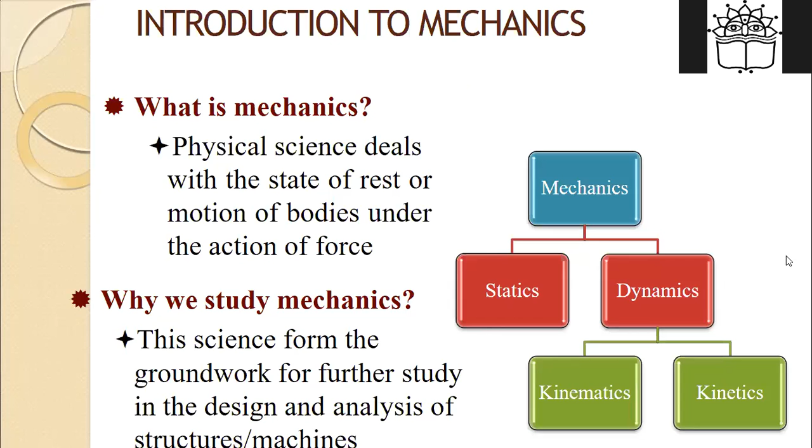Again coming to engineering mechanics, there are different types studied - this is the basic classification into statics and dynamics. But again, mechanics has 3 parts - three subjects. First is rigid body mechanics, which we deal with in the first year curriculum. Second is deformable body mechanics, also called strength of materials or mechanics of structures. Third is fluid mechanics.

Rigid body mechanics - I think you are familiar with rigid body. If not, rigid body means any body or structure that is not going to be deformed. It is very strong, having very large stiffness, so when any force acts on that body, the body is not going to deform at all. This is an assumption - actually when a body is subjected to external force, it is going to deform, but that deformation is very small, and we neglect it for simplicity.

And due to that, it is called rigid body mechanics. Whatever problems we are going to solve in first year mechanics, all deal with rigid body mechanics. So simply the name of the subject, you can call it engineering mechanics, applied mechanics, or rigid body mechanics.

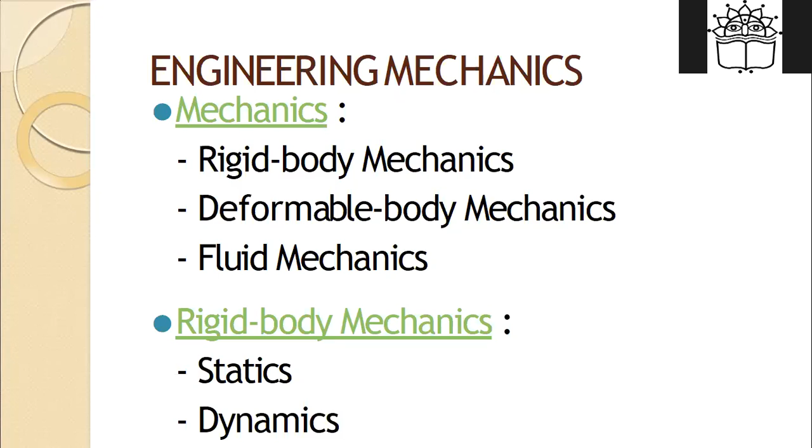Then fluid mechanics - the mechanics of fluid, water, any fluids. That will be another part you are going to deal with in your second or third year. So this is our rigid body mechanics, meaning simply engineering mechanics, statics and dynamics.

This we have already discussed. Statics means the effect on a body under steady conditions. Under statics, you are mainly dealing with resolution and composition of forces, center of gravity and moment of inertia, friction, and analysis of structures. Under analysis of structure, you are going to analyze trusses and cables.

And dynamics means study of moving bodies. Under that you are going to deal with work power energy, then impact of bodies.

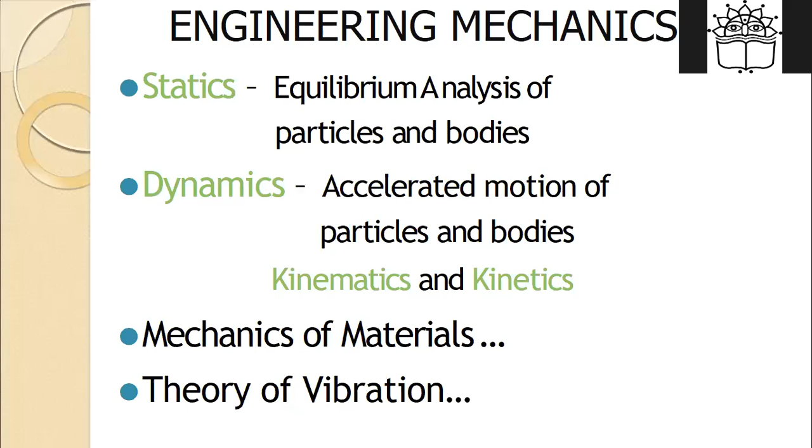Now for your engineering mechanics, there is a teaching scheme and examination scheme given by the university. See this - this is our engineering mechanics. The code of this subject is 101011. See, this is oblique - programming and problem solving oblique engineering mechanics.

Meaning 50% students are going to study PPS, and 50% students, if there are 6 divisions, divided according to group A and group B, alternatively have to study this subject. There are 3 lectures per week for theory and 2 hours per week for practicals. This is for your teaching scheme - meaning you will have 3 lectures for theory and 2 for practicals.

Then coming to the examination scheme, there are 2 examinations. First is the ISE - in-semester examination, which is of 30 marks, based on unit number 1 and unit number 2.

Now see, your college has already started. Your first round is completed. After completion of the second round, after your induction programs, your actual classes will start. And after 35 or 40 days, you have to appear for the in-semester examination, based on unit number 1 and unit number 2, with weightage of 30 marks. The university is going to conduct these examinations.

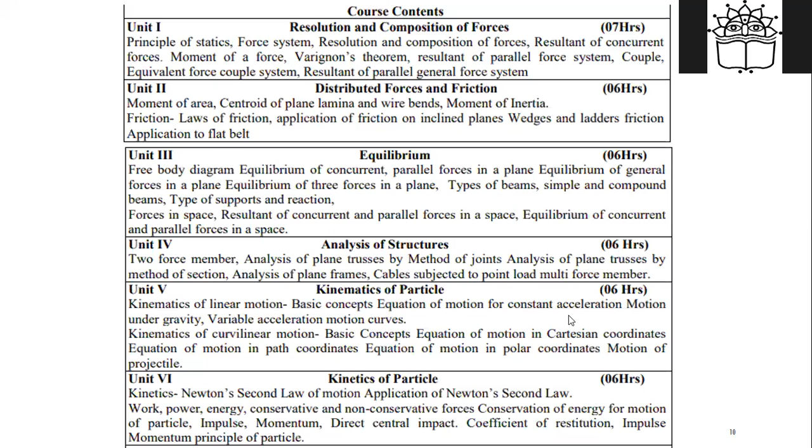And these are the number of lectures required to complete these parts. Then coming to the different books, these are the different books. All books given by the university are foreign author books. Your respective faculty will tell you which books you have to refer.

For engineering mechanics, Vector Mechanics for Engineers by Beer and Johnston is one of the good books. It is a bible. But again it is a vector approach, and vector approach is slightly difficult to understand, it is highly mathematical based. You have to adopt that vector approach.

But if as an interest or as a knowledge you have to go, you go for this second book, Engineering Mechanics by R.C. Hibbeler. R.C. Hibbeler is one of the best books of engineering mechanics, published by Pearson. It is available in our college library. Then there are other books, Timoshenko, F.L. Singer.

Coming to that, as far as our Indian author is concerned, you go for Engineering Mechanics by S.S. Bhavikatti, which is a very simple book, and in which both theory as well as the numerical part has been explained very nicely, easy to understand.

Engineering Mechanics by S.S. Bhavikatti or N.H. Dubey, published by Tata McGraw-Hill Publications.

There are a number of books available, so as per your interest, you go for that. But as far as possible, read the books, don't follow shortcuts, because each and every subject, application-wise, it will be required for your higher classes. When you appear for any interview or examination after completion of your BE, there is either a written examination or interview, and under that your basic knowledge will be checked.

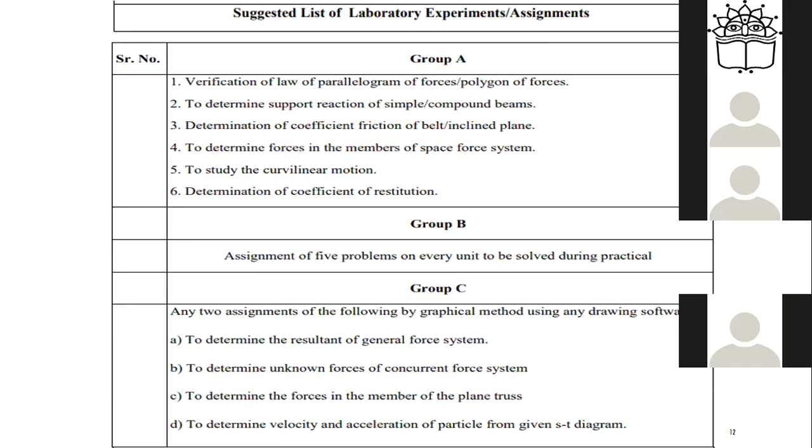Now coming to its applications. In first year engineering, it is a mix, meaning the class is not branch-wise. All branches of students will be in a single class - civil, mechanical, computer, IT, AIDS, all together.

For mechanical engineering people, when they are going to design any machines, cars, robotics, the knowledge of engineering mechanics and strength of material will be required. There are higher classes subjects like machine design, structural design. If you don't have proper knowledge of engineering mechanics, it is slightly difficult to understand.

Passing university examinations is a different thing. I have seen many students with very good pointers - 8, 9, 9.5 - but they are fundamentally very weak. Please don't do like that. Your fundamentals must be strong.

If your fundamentals are clear, you will have to put in less effort in your higher classes. For the proper understanding of higher classes' subjects, you must thoroughly focus on your first year academics - it is very important. This means your physics, mathematics, chemistry, mechanics, and programming - all these subjects will help you a lot.

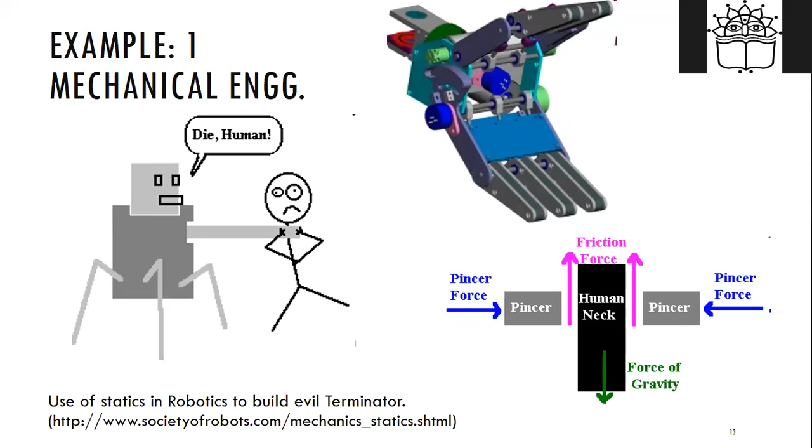For civil engineering people, they have to construct bridges, buildings, and many structures. So for the proper analysis and design of those structures, your starting point is mechanics. This is a very challenging as well as very important subject, and it is included in the first year. This subject has importance up to postgraduate courses - its application extends up to your MTech program, and it is included in the first year itself.

Application-wise, the importance of this subject is very high, but since it comes in the first year, we focus on clearing the basics, because this subject is not so easy - the entire subject is numerical based and you have to apply the concepts. If your faculty has taught 10 examples in class, there will be some different examples in the university examination.

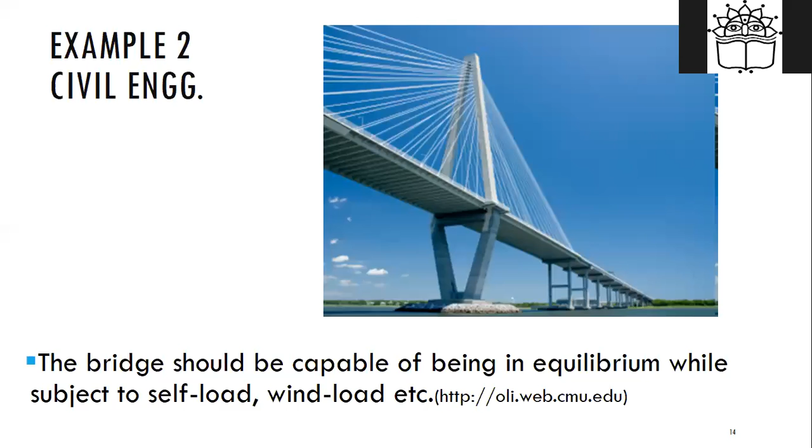Okay, a simple small change will be there, but the concept remains the same. There are just slight variations, and students are getting confused because of this and they will fail. So that's why understanding the concept is very important for engineering mechanics, for all subjects, but engineering mechanics is one subject you cannot just memorize. You must properly analyze and understand the things, then it will be very easy for you. It is a very scoring subject because it is entirely numerical, and it is interesting if you take interest in it, otherwise it looks very difficult.

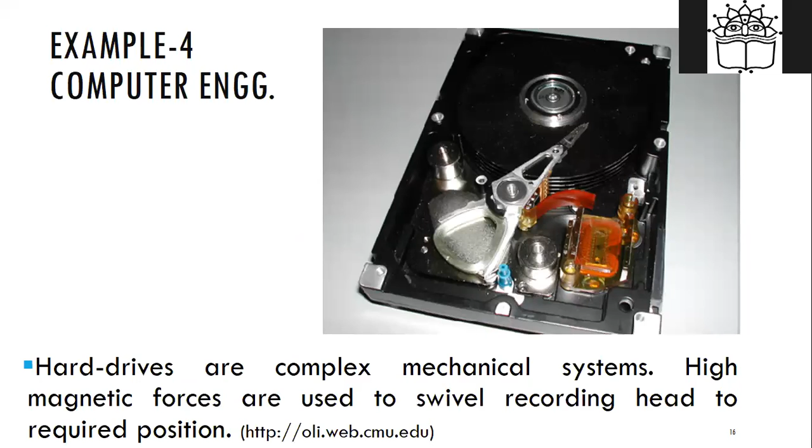Okay, then biomedical engineering - these are the applications I am talking about. For computer engineers, they deal with hard drives, and magnetic forces come into the picture. When there is a force involved, you have to deal with engineering mechanics, you have to analyze those parts. For electrical and ENTC engineers, during an earthquake, some energy has been released - how much energy has been released? To calculate that amount of energy release, we have to take the base of engineering mechanics.

Now coming to the modeling of real life problems. See, as engineers, we deal with real life problems. We have to design machines, we have to design structures. So for real life problems, we have to analyze the problem, we have to model it into a mathematical model, and that mathematical model is called the free body diagram.

It is the most important concept in engineering mechanics - free body diagrams. For every structure or element, we have to draw its correct mathematical model or free body diagram. Once your free body diagram is correct, your answer will be correct. If your free body diagram is wrong, you will not get the correct results. How to draw free body diagrams, what are the different rules - that you are going to deal with in unit number 3 in detail, when you start the equilibrium topic.

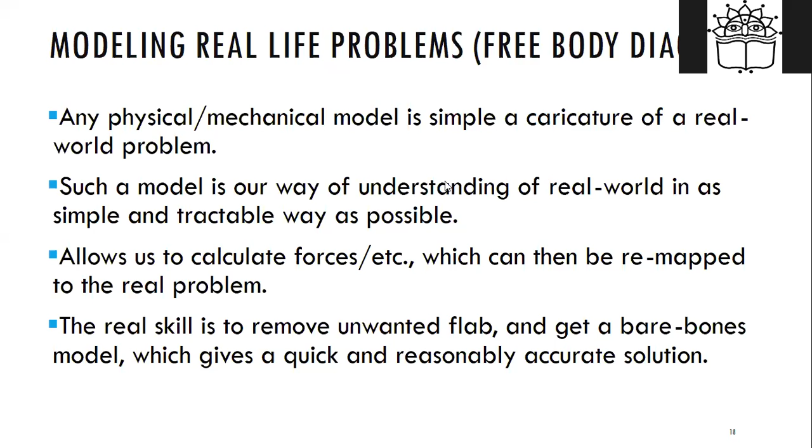So coming to what a free body diagram is, I will show with the help of a few pictures. This is one example, a real life example. One truss, a building truss, and this truss has been modeled using simple line elements. Under that line element, various forces will act, and after that we have to calculate the reactions and member forces. So this is one real life example modeled using the concept of free body diagrams.

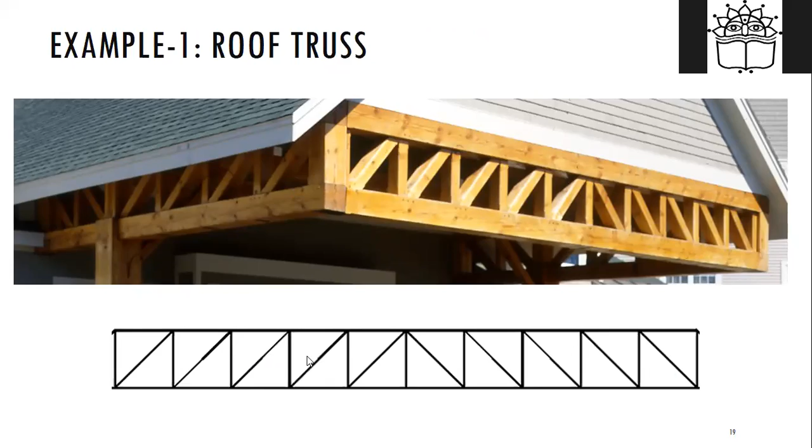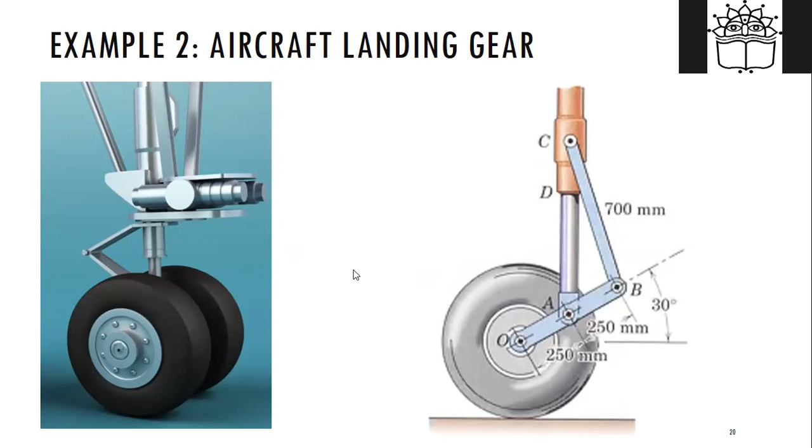This is an aeroplane landing gear. When an aeroplane lands on the ground, there is an impact force, there is a dynamic force, and the self-weight of the plane and passengers. Since all these forces come into the picture, this gear has to be designed by considering all these forces. So application-wise this is very important - we have to understand the basic theory.

This is a bridge - there are some RCC elements, railway bridge, road bridge. To analyze this bridge, this real life problem, we treat it as an engineering mechanics problem. In engineering mechanics, you deal with such beams - actually it is a continuous two-span beam, it is an indeterminate structure. But what is determinate or indeterminate is a different story.

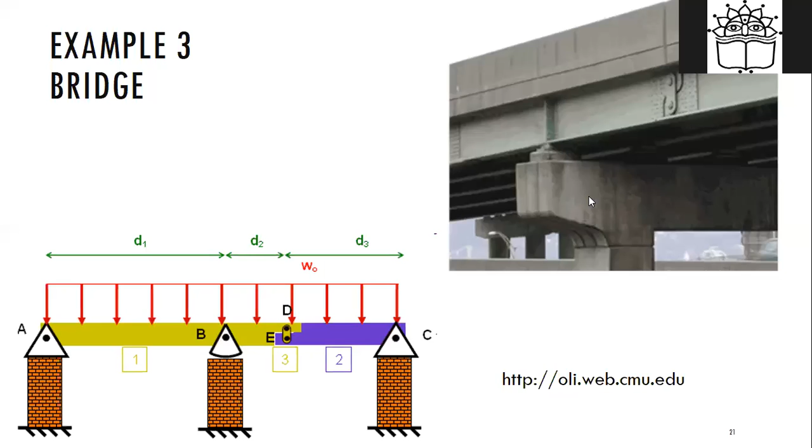It is not included here, but you are dealing with determinate structures. So these real life problems, the free body diagram has been drawn using the concept of engineering mechanics, and this is where we analyze. This is the load acting on these girders, and we calculate the support reactions, and after that stresses and strains. After getting these stresses and strains, we design this bridge - designing the girders, foundations, abutments and piers.

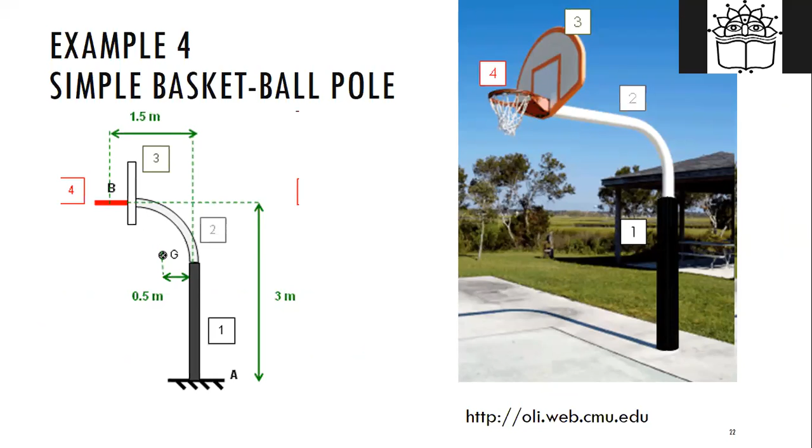This is your basketball pole, the actual problem, and this is its free body diagram. Using this free body diagram, we are going to analyze this - how to analyze, how to do it, you are going to study in detail. Now if I tell you this, you may be in a panic that it is very horrible and very difficult - don't panic, it is very simple, you just have to go the proper way. This is some such problem you are going to solve.

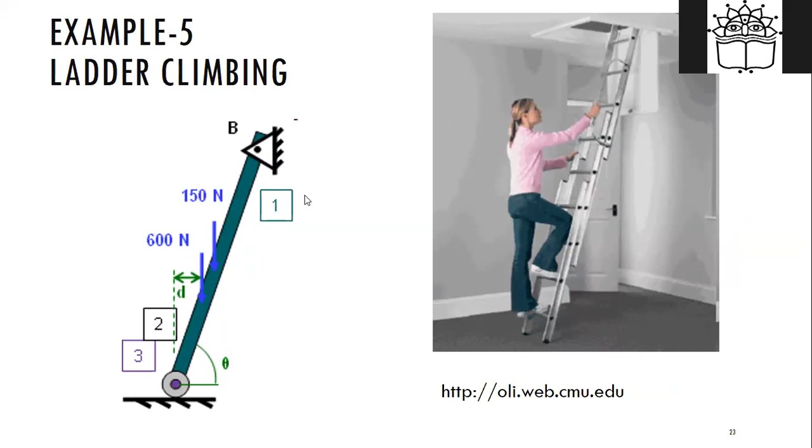Ladder climbing - this is the ladder, one lady is climbing this ladder. So we have to consider the self weight of this ladder, since a ladder has its own weight, plus the weight of this lady. So this has been modeled using this mathematical model - this is the mathematical model of this example. Now the concept of normal reactions comes into the picture - normal reactions.

Relative motions, rectilinear motions, circular motions - so this is about the basics of engineering mechanics. When college actually starts, you will deal with the entire detailed syllabus, unit wise, unit 1, 2, 3, 4, 5, 6.

Now coming to engineering as a career: globalization and subsequent invasion of MNCs (multinational companies), and the IT boom in India, has given a new dimension to these conventional careers. Nowadays you have very good opportunities in front of you, opportunities as well as challenges, so you must have courage to face those challenges and move ahead.

Now you have taken admission, so welcome to engineering. What is meant by science, engineering and technology? Science - you have done your general science - means understanding the basic natural laws and rules. In engineering, we have to apply that science to make our life safe and comfortable.

For our safety and comfort, we design buildings, we design cars, we design computers - these are applications of science. And after that, technology comes - the outcome of engineering design is technology.

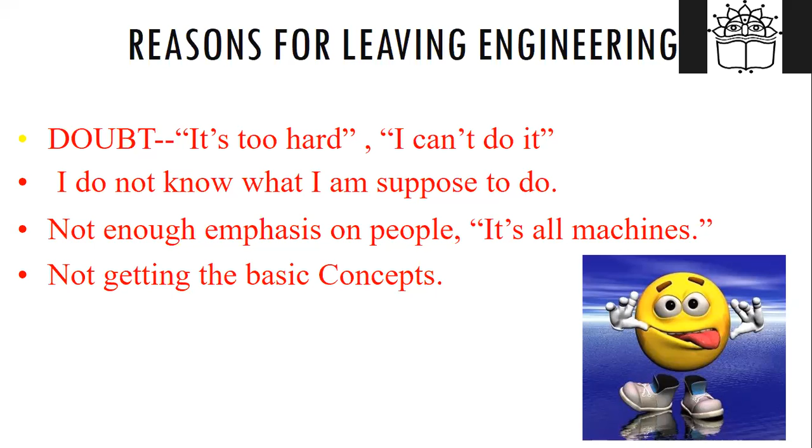But see, not getting the basic concept doesn't mean average students cannot perform well. You just have to give sufficient time. So time and consistency are very important. Those students who are very consistent will definitely succeed in their lives, and their performance will be better than the toppers of the class.

So, should you become engineers? I will skip many slides because there are a number of slides. What are the qualities as an engineer? What qualities do you have to develop? This is first year engineering, and I have already told you this is the right time that you have to use these 4 years in a very systematic and planned way. It's not like that every time you have to study.

You have to enjoy your college life, and at the same time develop your ability, your different skills. You have to develop interest in engineering - definitely you have interest, that's why you have taken admission - and at the same time develop your analytical skills, your problem solving attitude, and communication skill. This is required, because there are many students who have a very good pointer, but they don't have the confidence of good communication skill.

They are not able to properly talk in front of people. So ultimately they have to either work on that, or if they don't, they will get a penalty, or they won't be able to succeed due to that lacuna. So proficiency in each and every subject, persistence, listening skill, team attitude - your consistency will be very important. You have to develop listening skill. It's not that if you are the leader, every time you have to order people - you have to listen carefully to your colleagues also. Listening skill is very important, because many times your problems will be solved by listening to other people. And team attitude - we have to build teams.

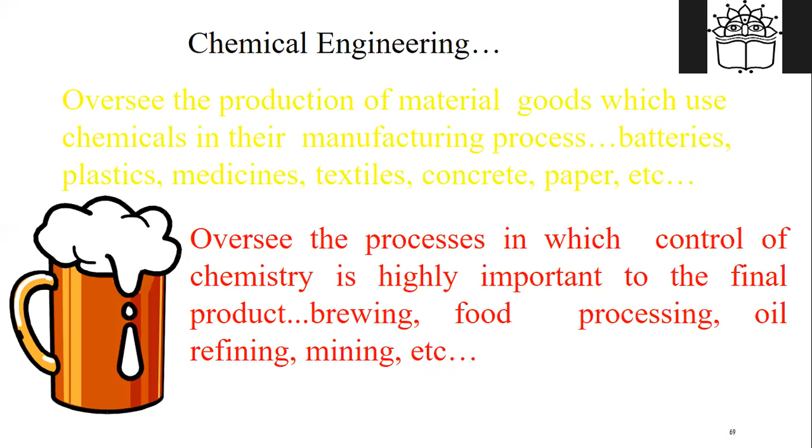Then there are a few more. I will skip many parts because 10 minutes remain, so I have to discuss many more things which are in the later slides.

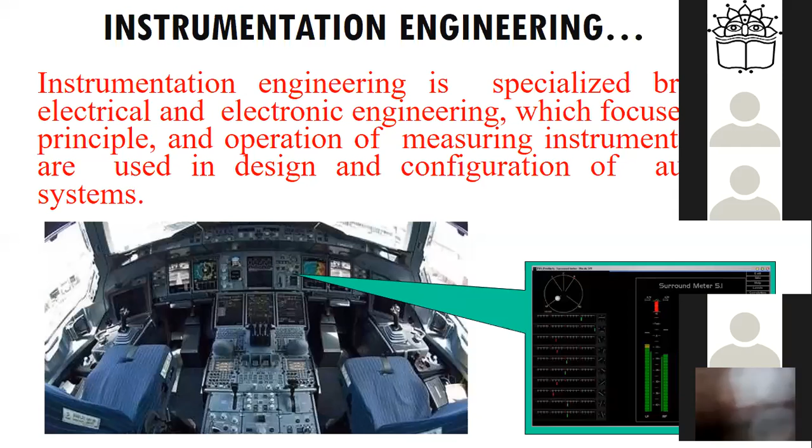Now, how do I become an engineer? Once you've decided you want to become an engineer, you have to plan ahead. Not only have you taken admission, your first priority now is to pass your first year in first class, so for that you have to study hard. After that, your next plan is to complete your degree with a very good score, and after completion of your degree you must get placement in very good companies. So we have to continuously talk to our engineers, about our subjects, our family, friends, relatives, and community.

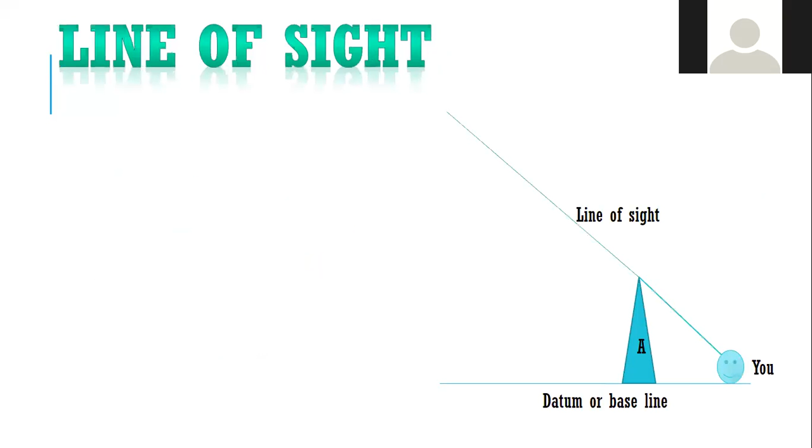So this is the line of sight. Your vision should be like this.

Remember, no one will motivate you until you motivate yourself. Your parents, your teachers will help you to a certain stage, and after that the entire journey you have to run by yourself. No one will come and...